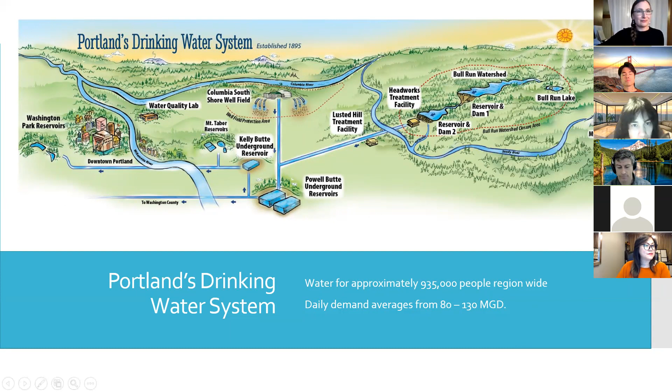One fun fact about the drinking water system is that it is gravity fed for about 85% of the way, which means we don't even have to pump it until about Washington Park. Then we need pumps to get it up into the west side. That was some good forethought back in the late 1800s.

I've been talking about a watershed - I know that's sort of an abstract idea, so just wanted to throw this up here. A watershed is this area of land where all of the rain that falls on it is draining to a common river or lake source of water.

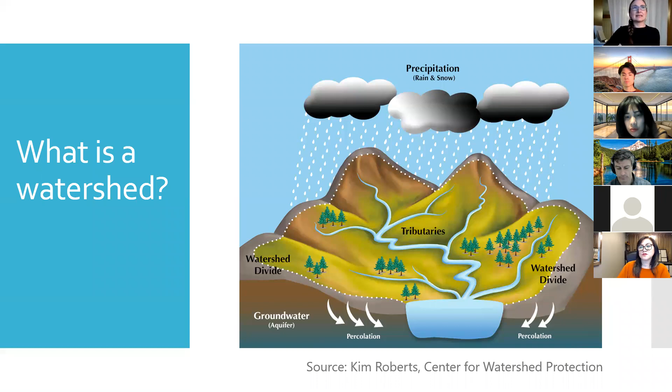You can see in this outline our area of land where basically all of the water and snow, all of the rain and snow that falls here, is going to drain into the river that we then drink. And we don't drink all of it - we only drink about 20% of it, and the rest goes downstream for fish and everything else.

So from the Water Bureau team, is there anything that I missed on our big picture system overview before I hand it over to Matt?

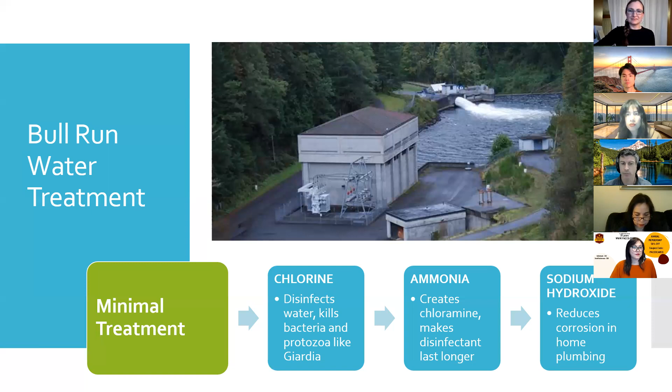A common question we always get: do we fluoridate our water? We do not. There's just a small background level that's naturally occurring, but we do not add fluoride. For future treatment and filtration, in a little over a year we will have improved corrosion control, adjusting the pH and alkalinity of our water. Then in 2027, we'll be installing a new filtration system. More information on both of those can be found on our website.

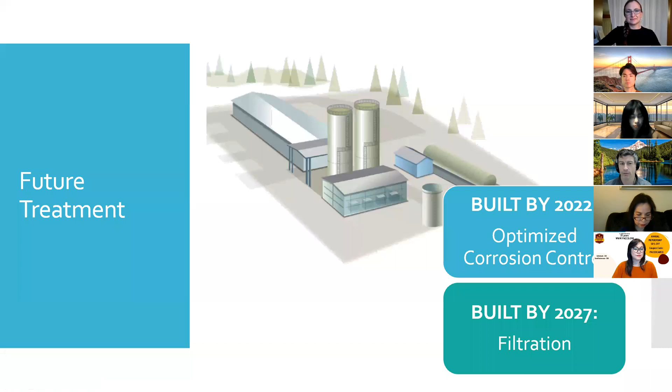After treatment, we can't just walk away and say the job's done, because we have over 2,200 miles of distribution system. So we have strategically located monitoring stations and certified samplers who collect water samples every day of the week to check the vitals, gauge the effectiveness of our treatment, make sure we're doing everything to provide safe drinking water, and make adjustments as necessary.

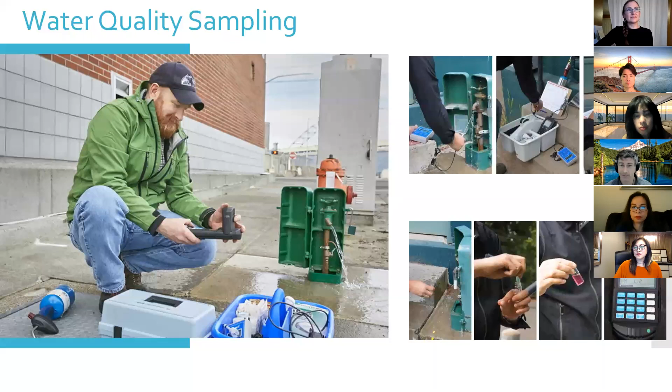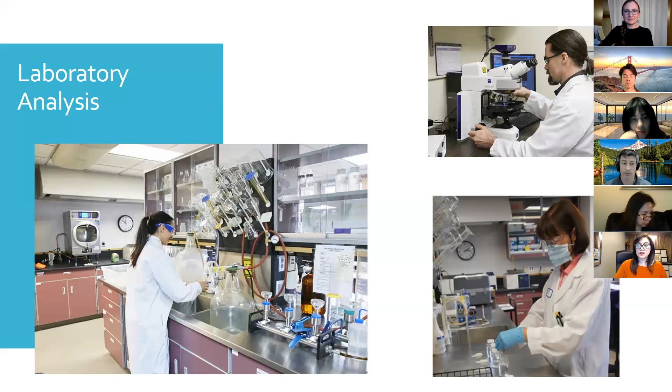Our field staff bring in about 11,000 samples a year to our water quality lab. That lab internally processes and conducts about 50,000 analyses on those collections of water. Those regulatory samples are validated and reported to the Oregon Health Authority on a monthly basis. Even before COVID, our lab techs were protecting against any kind of bacterial cross-contamination. Now with COVID, even myself, when I go into the lab to drop off samples, we take extra precautions to make sure all of our customers continue to receive safe drinking water.

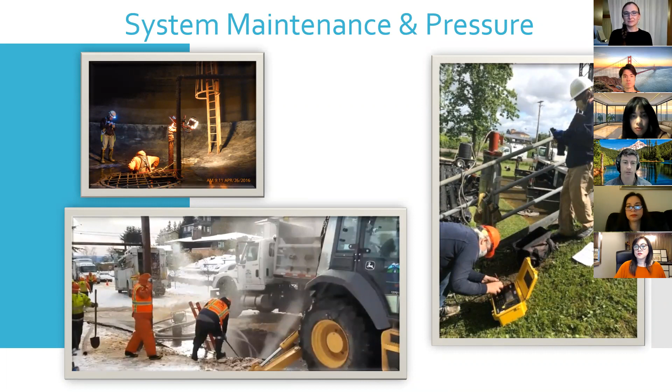System maintenance and pressure are also very important to our system. Without proper maintenance—our workers getting in the trenches despite rain, shine, or snow, as well as getting into above-ground tanks for cleaning and disinfection and maintaining the condition of our system—we have to make sure we're maintaining the pressure. So if there's a break, there's less opportunity for cross-contamination or something to get into our system, because that pressure is pushing things out. This pressure also ensures we have adequate fire response.

As I mentioned at the beginning, while we do the bulk of the work to deliver safe drinking water for you, we see water safety as a shared responsibility. So what does that mean? Just transitioning, especially with the impacts of lead—we see it's especially important when it comes to lead in drinking water.

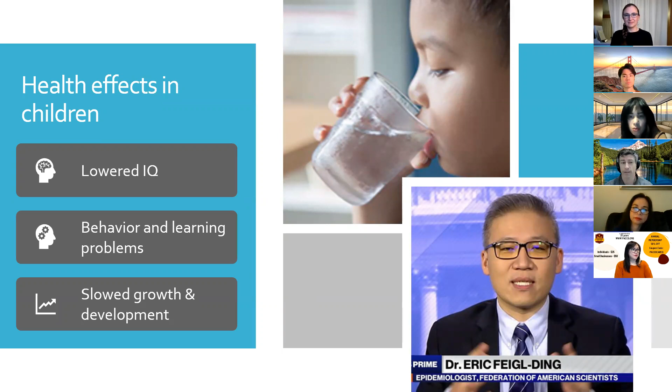But when it comes to lead poisoning, especially for young children, unfortunately the damage is permanent. So how do you know if your water is safe?

As I mentioned earlier, we treat our water by adjusting the pH, making sure that the water is less impactful on indoor plumbing. That's our job as a utility. We're also one of the first utilities to voluntarily offer lead in water testing to our Portland customers, and we mail out thousands of kits annually. If you have higher results, we'll contact you and talk to you about ways that you can reduce that.

So where does the lead actually come from? We do not serve lead, we don't serve water with elevated levels of lead. We test our distribution, the water in our distribution system, and it doesn't have high levels of lead. But once it enters a home, depending on a number of factors for a business or a home, especially the age of the home, which I'll talk about in just a moment, could be impacting the water quality in your home, especially related to lead.

So as a property manager or homeowner, you're responsible for maintaining your service line, which runs from past the meter, as well as maintaining the indoor plumbing.

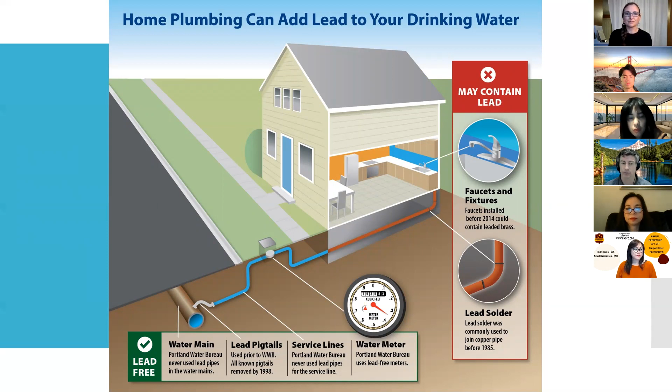With the next slide, many people think it's really older homes, turn of the century or older, and that gets confused. It tends to be more galvanized plumbing, which is just iron plumbing. In those cases, typically you're not going to have higher levels of lead. And luckily, basically just homes in Portland, we don't have lead service lines like in the east parts of the United States. It's less common here.

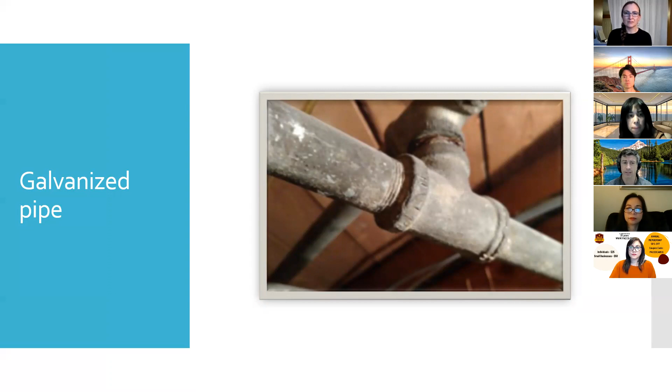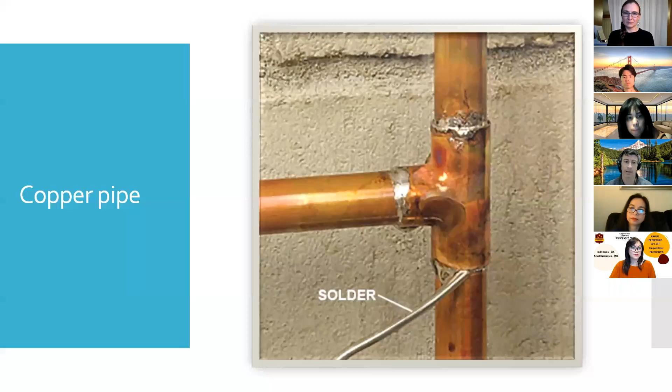It's more related to homes that were built between 1970 and 1985 that used lead solder. That's of higher risk. And as well, legislation tends to be behind science, so fixtures older than 2014 could have higher levels of lead. So you may or may not know the age of your home. You may not know if it was replumbed during that time. So that's why we recommend that you test.

So we have a number of recommendations to provide. We can provide you a lead test kit, which you can easily request. These two suggestions are things you can do if you have high results or if you haven't tested yet, to reduce your exposure to lead in drinking water: one, running your water for 30 seconds to a couple minutes, especially after it's been sitting overnight or you've been away. That is probably the most effective way to reduce the levels of lead. You're just able to flush out anything that's corroded into the actual water itself. And then using only cold water and not hot water, because hot water can increase corrosion.

In some cases, people use filters, and we can always talk to you more about that. If people have other color or specific questions about their water quality, I can always chat with them either at the end of this or offline as well too.

So ordering a kit, we recommend going through Multnomah County. We partner with them, they manage the lead line. That's the easiest way you can do it. You can either order it online or give them a call. We then receive a list and send those kits out manually each week. But they're available to all of our Portland customers.

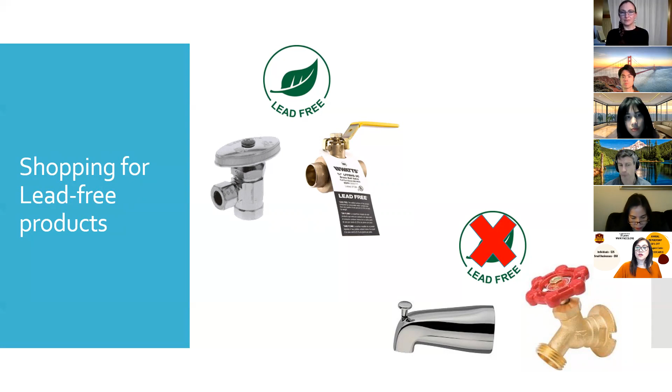Close to the end of my section, child cares, we offer free lead testing. So if you have a business running a child care, we do offer that free for Portland residents. If you're outside, I believe the process is the state will work to reimburse working with a lab to get your water tested. It is required if you are also a child care.

If you're concerned about your own child's exposure, we recommend requesting a blood lead level test and working with your doctor. And then Multnomah County, they're still supporting family investigations right now. So in cases where there are children with high blood lead levels, they're offering COVID safe investigations.

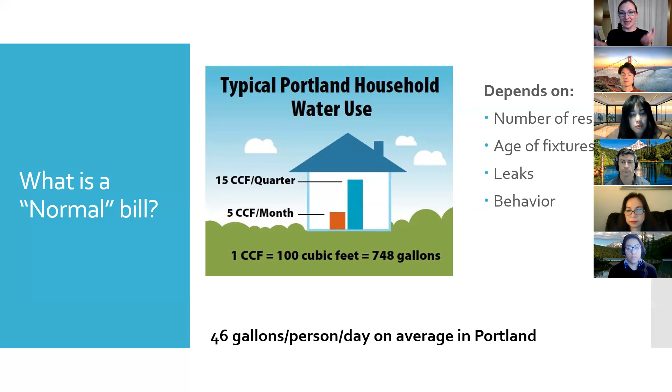So it's both the behavior and the technology side. But on average, I'll show you what we use as a country.

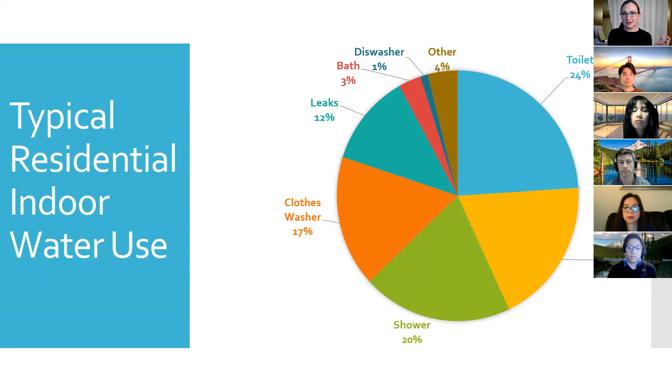Most of our water actually goes to toilets, about 24%, based on a national study, closely followed by showers. If you combine baths in there, then we go down from there into faucets and clothes washers, etc. So that's a helpful breakdown if you're thinking about where do I start if I want to reduce my bill or my water use.

And we're going to start with toilets. Especially older toilets, it really matters. If they're pre-1992, they're going to use about 3.5 gallons or more per flush. Now our toilets, the WaterSense version, which is the water efficient version, use 1.28 gallons or less. So that's a huge difference.

You're cutting your water use in half just by swapping out a toilet that could be older and that you want to replace anyway. If you do that, we have rebates available, as do many of our other partners and utilities around the region. I know Tualatin Valley does, and Gresham does, for folks out in Aloha and Gresham.

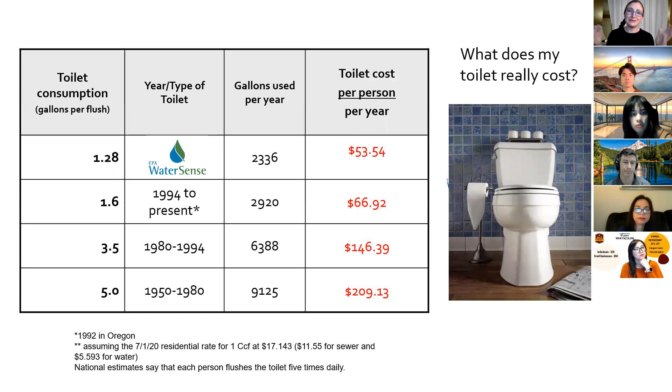And just so you can see the breakdown of how much it costs, it really does save you, even just in paying your water and sewer costs. It's about a quarter. So if you get a water efficient toilet, it's about a quarter of what you would spend if you had an older toilet from between the 50s and the 80s, which is an old toilet, but they still exist out in homes.

I'm not going to spend a lot of time on this one, but I want to put out there that if you live in a single family home, or if your business is connected to a meter that's just yours, you can actually do a test where you go out and look at your water meter to tell if you have a leak or not. We'll go to the next slide to show you how.

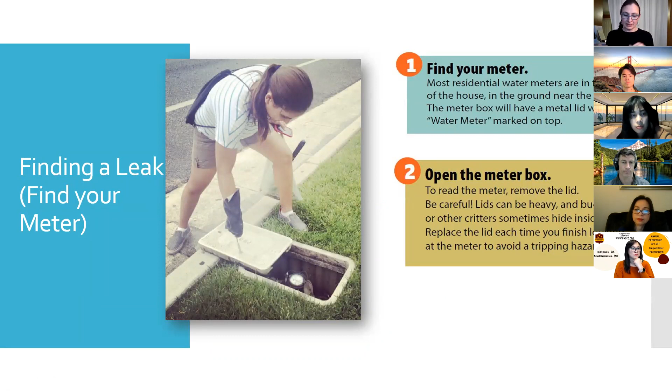What you're really paying attention to first is making sure nobody's using water inside the building, inside your home. Then you go back out and look for the leak detection dial. It could be a snowflake or a blue triangle on some meters, but in this one it's a red triangle. That is going to be spinning if small amounts of water are going through your meter.

The other things on this dial are also going to move eventually. The sweep hand is going to move, but it moves slower than the dial. So the leak detection dial is really what's going to tell you about those smaller amounts of water.

So this would be a fun experiment over the weekend. Go home, or go wherever you can to access a water meter that is yours, and see if you can find it. Typically it's out by the sidewalk close to your home. If you go straight out from your home and start looking around the sidewalk area, they'll have a metal plate on top with a water sign or that says meter, and you're actually going to take that off and look at the meter itself.

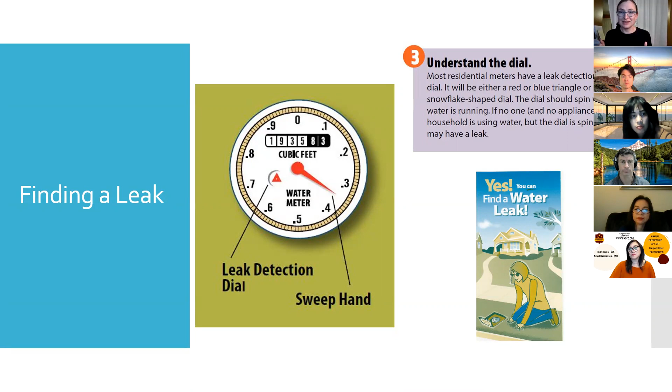There's a faceplate that you'll open inside, and you're welcome to do that, it's okay. Just make sure you put everything back at the end. Feel free to ask questions on that at the end if you have them.

I am a little tight on time, so I think what I'm going to highlight here is that this is a City of Portland bill. If you're elsewhere, this is going to make less sense. But for City of Portland, you can see that there is a discount on this bill, and that is a Clean River Rewards discount. Fabiola is going to be talking about another discount that is based on income, but this discount is available to anyone. It's not based on income, it's about how you manage the water that runs off of your roof.

And if you're thinking about it from your business, how you manage the water that runs off of pavement and other hard surfaces, things where water can't soak in. I'm going to pause on this, and I'm actually going to hand it over to Fabiola to talk about some more ways that we can support you with that bill discount program.

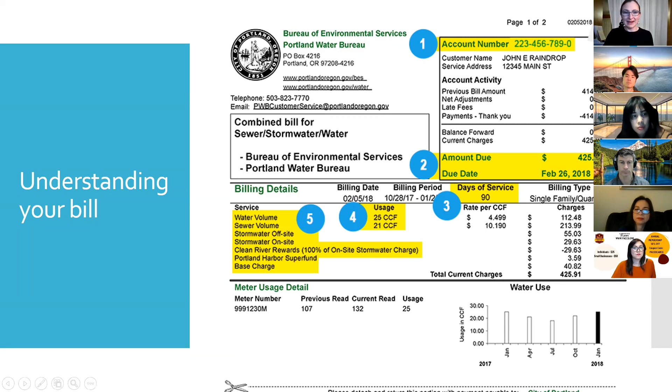My name is Fabiola, and I work with our financial assistance program. There was a big expansion of our services in 2018, which is really exciting. If you're in the city of Portland, hopefully you've heard of these changes. If you're outside the city, contacting your utility provider to see what they have available will be important. We want folks to feel empowered to ask questions about their bill, and when things get overwhelming, to access the programs we have to make it more manageable.

The first one is the bill discount, and to qualify for crisis assistance, you have to qualify for the bill discount. The way it works is you look at your household — anyone physically living at the property with you, so family members, tenants, relatives — and you look at the combined income.

Then there's a table guide where you'll see if you qualify for the bill discount program. If you do, you apply, and on your future bills you'll start seeing a discount, which will continue for as long as your household continues to qualify, for 2 years.

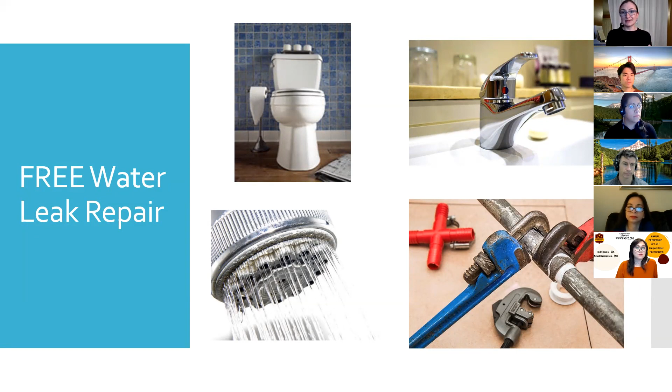We give out free conservation devices. If you own a restaurant, you might be interested in one of these pre-rinse spray valves — maybe Jeff will tell you more about this one. We've also got shower heads and faucet aerators, dye tablets that go in your toilet to check for leaks, and if you water outside, you might want one of these hose nozzles. Those are all free — feel free to order them online.

We also give out a lot of rebates, available to commercial, multifamily, and residential customers at varying levels. We do toilet and irrigation-related rebates, and on the commercial side, if you're a restaurant owner, we have ice machine rebates if you replace a water-cooled ice machine with an air-cooled one. Jeff could probably tell you more about that, and I'm going to hand it over to him — he's really focused on supporting our business customers.

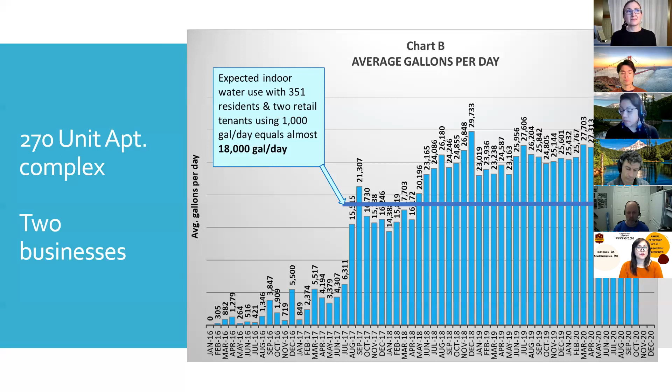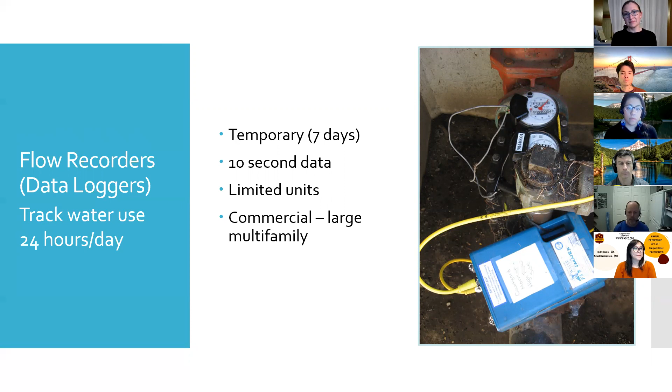We're out deploying these or picking these up, and they're a very valuable tool in trying to figure out what's happening with the water use.

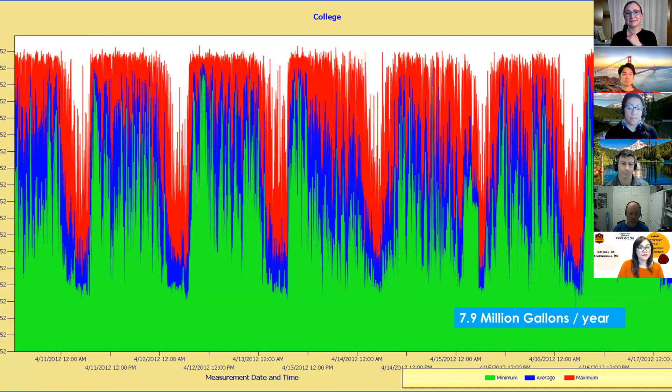While a typical leak might be 10 gallons a day, we see them in the hundreds. In fact, when we go out on an on-site visit and find a toilet leak, the average loss per day is 1,000 gallons from a toilet leak, and they can leak as much as 5,000 gallons a day. If you have a commercial toilet left unattended, you can get into the tens of thousands of gallons a day. So toilets are kind of our nemesis when it comes to unexpected water loss, and the flow recorder helps us identify them.

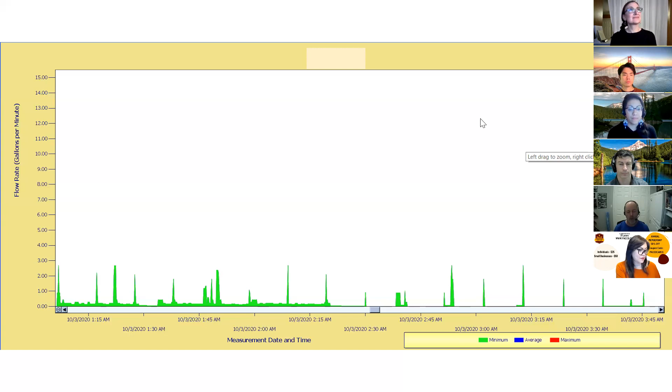So we connected this ultrasonic meter and were able to get the same kind of data and see how much water was flowing and how much it was costing them. They actually went ahead and replaced that machine with the ozone unit and saved hundreds of thousands of gallons a year. So it's another tool we have at our disposal.

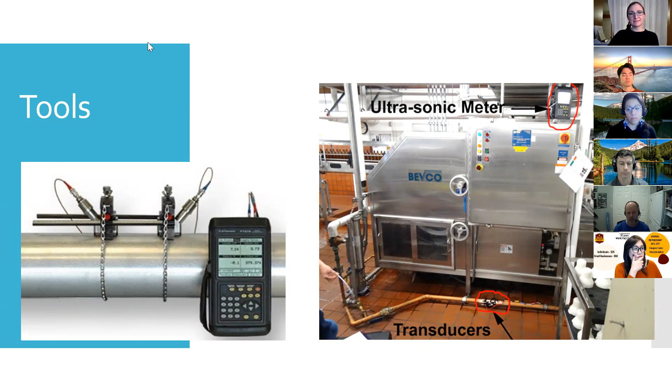I do see a question in the chat - I had plugged in the website for our financial assistance information, and there's a question asking if it's the same website for the commercial program services. Jeff, is there a place on our website where folks can get more information about that? Yes, absolutely, we have our own section on the website. You can search water efficiency or water conservation, Portland Water Bureau, and you can pull up the page that gives contact information for our programs.

Yeah, we'll try to get it in the chat too. We just switched over like 2 days ago, so we'll put our new webpage in there. Any other questions that came up?

Yeah, I do have a question, Penny. This is Lorelai. Jeff was talking about a flow recorder and all of that stuff - is that like a rental unit that Portlanders can rent and the Portland Water Bureau manages? Is there a fee for that?